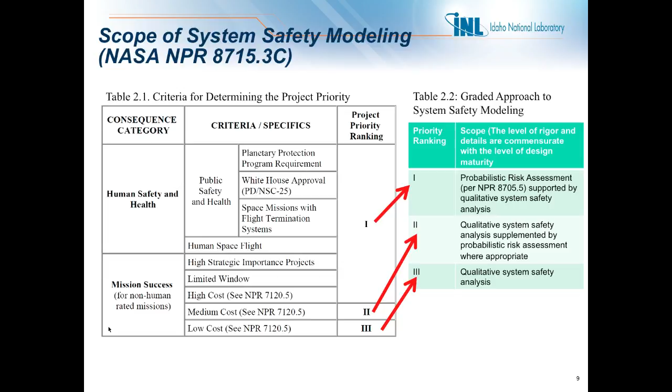At the Nuclear Regulatory Commission, of course, initially and still even today, they license based on classical safety analysis, where they tell you what challenges to analyze, and you have to show that you can meet those challenges. But PRA has been increasingly a factor in their decision-making. Not so much licensing, but decision-making about whether to intervene in licensee management. So after WASH 1400, the mid-70s, they did change some rules. And nowadays, to get design certification, you need to supply a PRA.

I'm supposed to mention risk-informed. They do both. They do the classical engineering analysis they always did, and they do PRA. You have to do PRA. But they don't have criteria that were mentioned this morning for Europe. They don't have hard numerical goals that you have to show you meet. They have numerical goals that you should address, but they are not licensing requirements. NASA, interestingly, uses thresholds for judging the suitability of systems for human spaceflight. That's a little different philosophy.

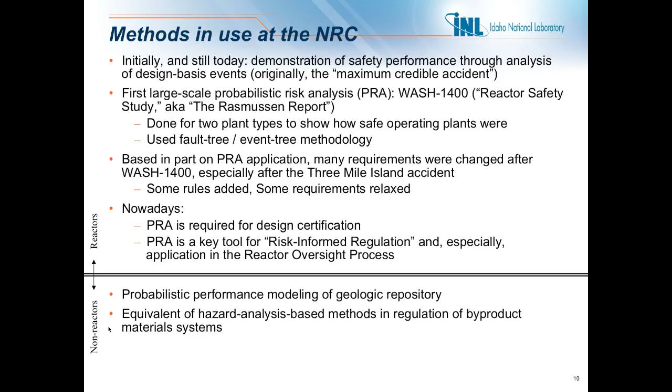At the NRC, at the bottom of the slide, I'll just point out the Geologic Repository people don't call it PRA, but they did a very thorough analysis of performance with a lot of attention to epistemic uncertainty. And then, of course, I mentioned already hazard analysis-based methods and regulation of byproduct material systems. So there's a whole spectrum in a sort of graded approach in use at the NRC.

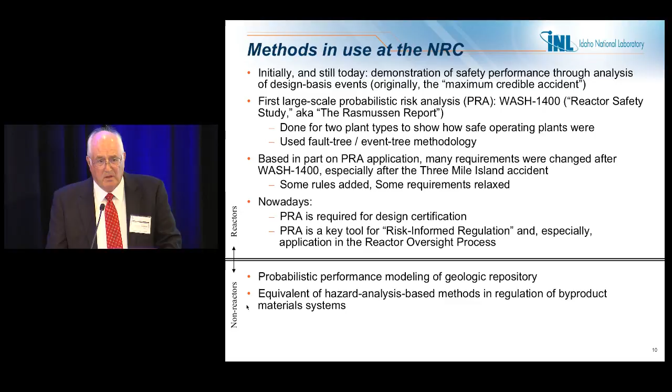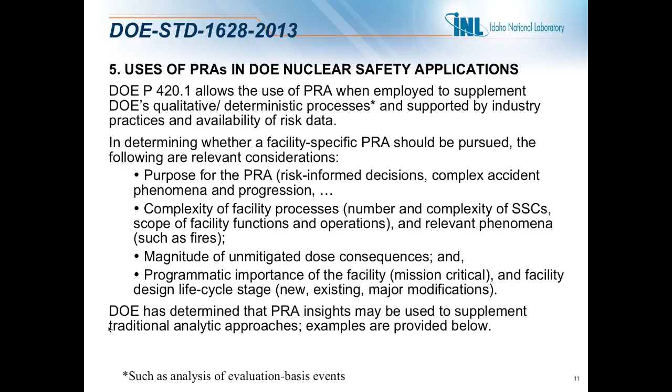So that sounds simple, and notionally it is, but if you begin to do it in fault tree space, it's just worse than daunting. It's just almost impossible to make sense of it in a logic modeling way. But it's easy, intuitively, to understand how the thing's supposed to work. When one breaks, you switch on the next. So the lesson drawn from this, well, he got 7 or 8 conference papers from people participating in the study. Every one of them that made any sense at all did simulation of some kind.

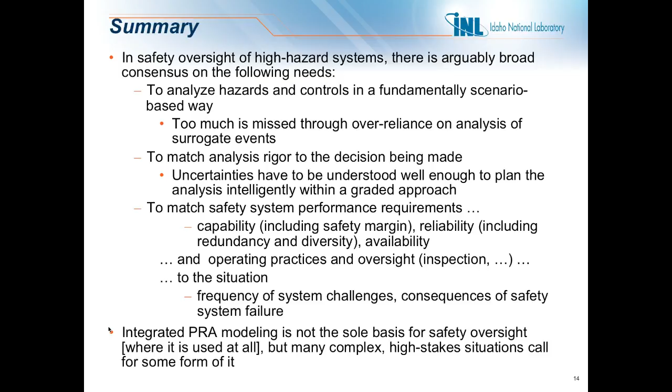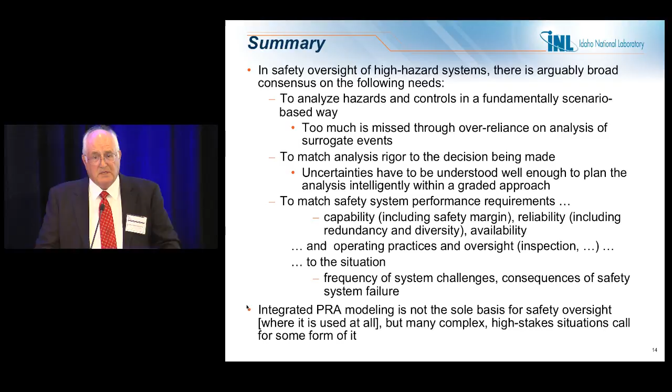So there's a point I need to get to here in the middle of the summary having to do with data. I would say that in our communities, in which I would include NRC, NASA, and the Department of Energy, a lot of us agree that there's a need to focus on scenario-based methods. And in that, I would include actually the hazard analysis methods that I had in the middle of my earlier slide. You don't have to be a full fault tree thing to be scenario-based. You just should be more detailed than having an engineering code telling you what margin you should put in. You need to match the analysis rigor to the decision being made, and you need to think carefully about how you're going to promulgate requirements.

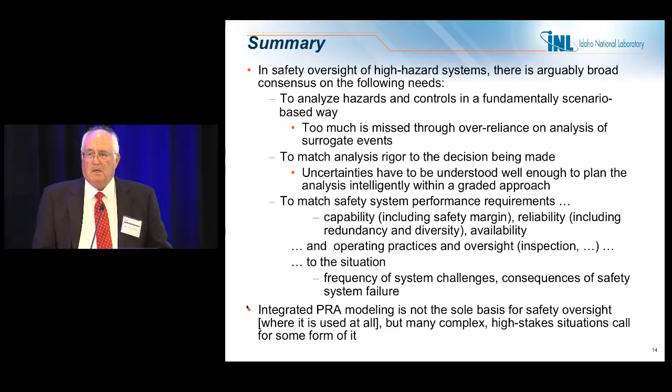Data. There's been actually, to my ear, some divergent positions taken with respect to data. Some people would say, well, they're uncertain, but I would argue that the right way to view a risk analysis is to say, suppose my scenario model is complete. The thing about the data, if I like the answer that it's giving me, then I need to commit to achieving the inputs. The inputs are investment decisions. They're numbers you have to make come true. And that's a slightly different answer than just saying they're uncertain. Sure, garbage in, garbage out, but if you like the answer, you want to make that answer come true, there are engineering implications of achieving those reliability numbers, achieving that margin.

So, not incidentally, by the way, and actually there was a slide like that this morning. If you have numbers in an owner-operator's PRA, a performance-based thing to do is ask whether those numbers are coming true, the inputs, not just the output.

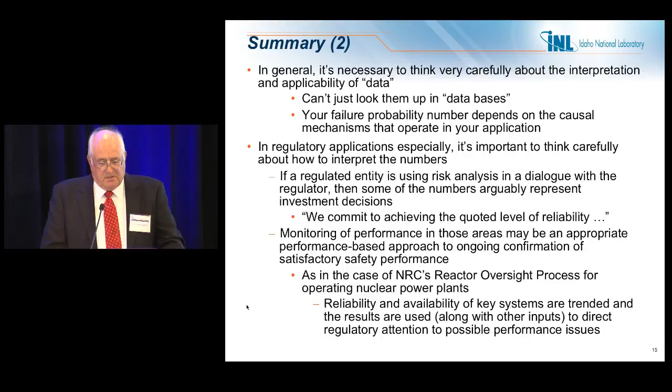And of course, there's a whole body of assumptions. I mentioned in the case of the NRC models, they will shut down if you know you're in a bad configuration. You may not have that luxury, but that's just the tip of an iceberg of a lot of assumptions having to do with the premise that the facility satisfies basic engineering requirements. So you don't get to forget about those if you're going to believe your PRA. You have to understand what drove the PRA structure, probability assignments that you made.

So in final summary, we've been doing this since the 70s, and we've learned a lot about doing it. The simulation-based stuff, if we combine phenomenology and reliability, that's extremely demanding, but as computers get better, it's becoming feasible. And we're learning better how to make more use of that. So that's the learning future for us in this PRA game. Thank you.

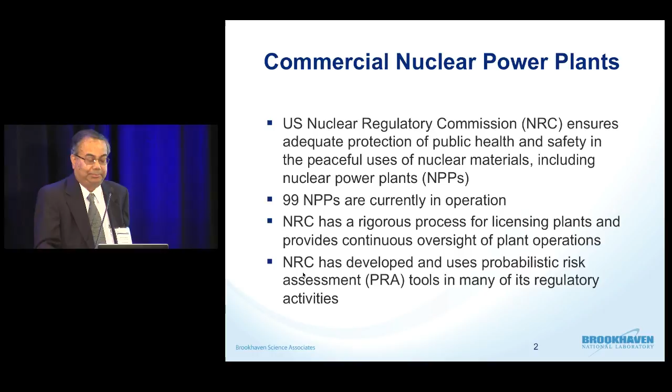I thought I'd give a little bit of introduction to the nuclear power plants and inspection requirements. And so I have these brief two slides that would also give a little background for the specific things that I'm going to talk about. Bob has touched on many aspects of the USNRC's work. I guess many of you are aware of it, and probably many of you were involved in the nuclear industry. NRC basically is responsible for the regulation of nuclear power plants to ensure public health and safety. There are about 99 nuclear power plants currently in operation.

And as Bob mentioned in previous discussions, NRC has been involved in and developed probabilistic risk assessment tools for many of its regulatory activities, and they are increasingly used currently. And as part of that, because of NRC requirements, all the operating nuclear power plants have plant-specific probabilistic risk assessment models done for them. And increasingly over the years, they have identified many uses, and they are increasingly being used.

And these tools have been based on many PRAs that NRC conducted over the years, and NRC had developed extensive programs relating to risk analysis methods, data collection, and tried to use risk insights. As part of that, NRC defined safety goals. Those are goals, not a regulatory requirement, and also had policy statements encouraging use of probabilistic risk assessment and these tools. The work that I'm going to discuss relating to inspection of nuclear power plants is part of the overall NRC oversight process.

And I believe it's approximately 15 years back or so, with the availability of risk information, NRC was involved in the process of improving their inspection process using a new reactor oversight process. And it is during that process more risk information was used and was increasingly found useful to improve their overall process. The basic idea in the reactor oversight process, which is currently used, and this will look very common sense, is to focus the inspection on activities where the potential risks are greater.

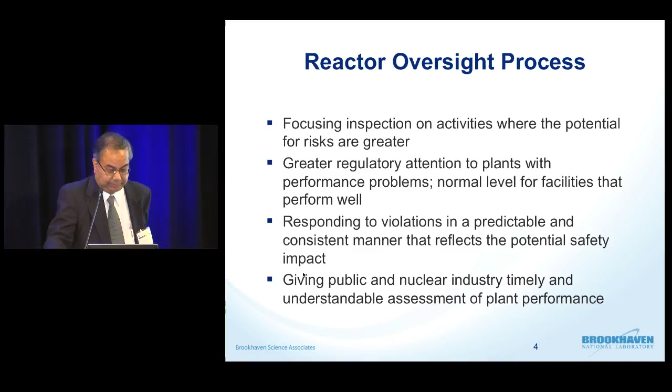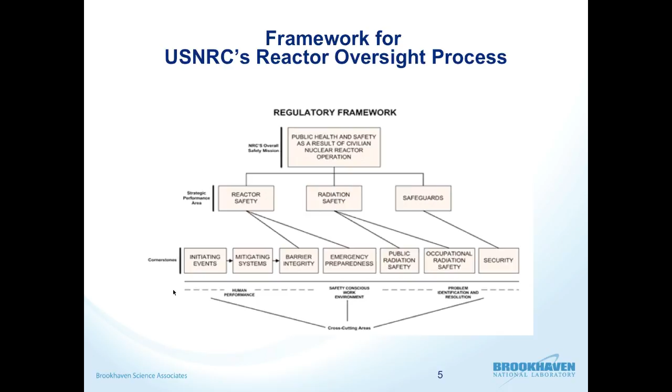So the idea or the thinking in this slide is that if you're able to address all the different cornerstones and the cross-cutting areas adequately through inspection, you probably would have adequately performed inspections and made identification of the issues that need to be addressed. So the oversight process and models try to systematically address all these different areas and, in a sense, try to maintain a similar structure and approach in the process.

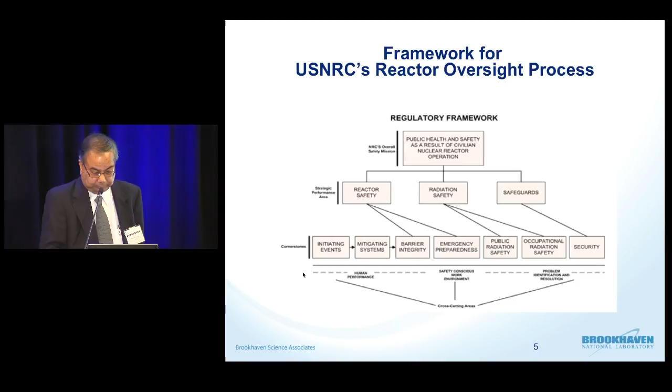Now, in trying to apply the risk assessment tools in the inspections, what one was looking for was to somehow relate the inspection findings to the risk implications. That, in a sense, gives a common currency, if you have a method that can be used across all the plants and can convert it into some risk number based on the findings. And in that way, some consistency can be achieved and different actions can be defined. So what we were looking for is a methodology to do that.

And what we tried to achieve here is an order of magnitude determination. Now, this is important because by selecting an order of magnitude evaluation, we were not looking for that level of precision in our modeling, and that simplifies a lot of things. In that way, your burden of accuracy in the data becomes a little less. You can make some assumptions in there.

And the reason we sought an order of magnitude evaluation is because ultimately inspection decisions probably won't be made based on whether it made a difference between 5.1 × 10^-6 and 5.5 × 10^-6. You'll make decisions based on whether there's an order of magnitude difference relating to the finding that has been made. And so in that way, a number of simplifications can be made. At the same time, your results would be adequate for the inspection decisions that you need to make.

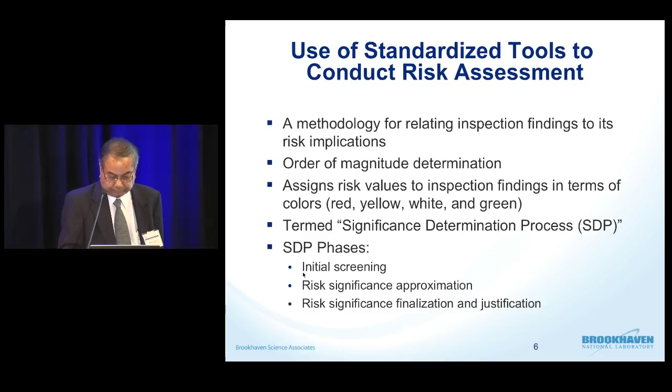Now, what we faced in doing this work: even though the nuclear industry had been working on probabilistic risk assessment models, and there were plant-specific PRAs available in all cases, within the detail there were a large number of variations in the model. In most cases, they used some form of event tree/fault tree modeling, but there were differences in those models, in the level they addressed, how they treated very specific issues. And so what we needed to develop are some consistent assumptions, because only by treating similar issues consistently across the models could we get consistent results relating to any defect, any findings that we found in a particular facility.

And one of the other requirements we had was that since the inspectors would be using these models, and all inspectors may not be very familiar with the risk methodology, and the risk methodology uses a lot of jargon and terms that are familiar to that industry but not necessarily to the inspectors at the facility, even though we were using risk information, we tried to present the models in engineering terminology that is commonly understood by the inspectors. These are based on discussions we had with the inspectors at the time we developed these models. So in that way, the inspectors would be more interested in using these tools, and their training requirement would be a lot less.

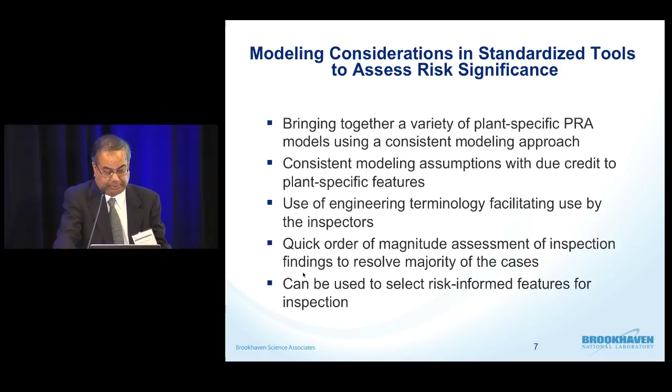And so this is one example; like in threat assessment, we have many initiating events in any nuclear facility. So all those events are analyzed, and as I said, we developed this model for all the nuclear power plants, and we had to make consistent assumptions, develop similar threat identification, similar initiating events for each of the plants, and corresponding mitigating measures that are applicable.

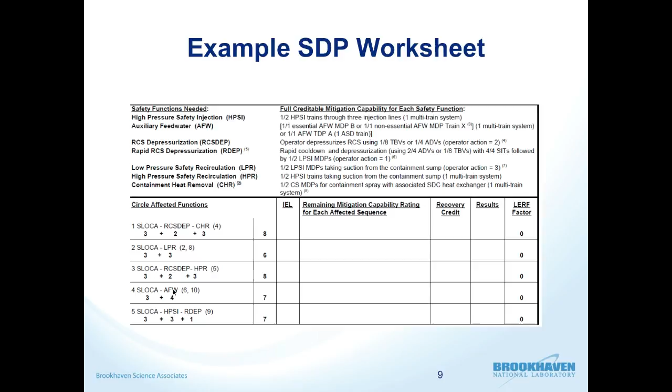So the idea behind it is that a significant risk modeling effort is involved, but it is ultimately presented to the inspector in terms of the essential barriers needed in a particular scenario, and the information is presented in a form that he can directly use for his inspection decisions. Of course, he's not handling only one worksheet. He has to handle a number of such scenarios, and these are computerized. The risk modeling information is available and presented to him in a compact form this way.

And similarly, from these numbers, from this scenario, he can also choose the focus of his inspections. And he can use the numbers, the overall risk of the facility or response to a particular kind of threat, in various ways. In terms of actions to be taken by the regulatory agency, obviously, there is a performance-based feature of the oversight process. If the findings are of increased significance, higher levels of action would be required.

In the case of the NRC's action matrix concept, depending upon the risk significance of the finding, if it is a relatively minor finding, it is left to the licensee, to the operators, to take actions. And at a certain level, if you are degrading a cornerstone, higher level management would be involved and certain other actions would be required. And at some level, if you find a major finding, if the risk is very high, it would be unacceptable performance, and the plant would be shut down.

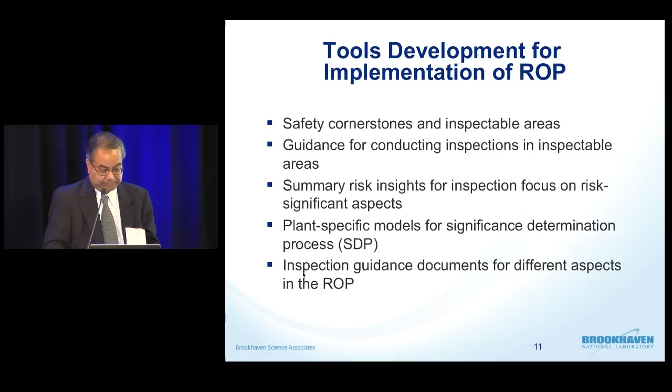So to wrap up, essentially, I have presented you a particular area. At the nuclear industries, the many areas worked on the risk analysis. I believe some of these features, some of the insights that we obtained could very well apply. And in this particular case, I think developing inspection guidance and tools should be very useful, and some of the insights that we obtained from this work probably would be applicable, hopefully would be applicable for your industry.

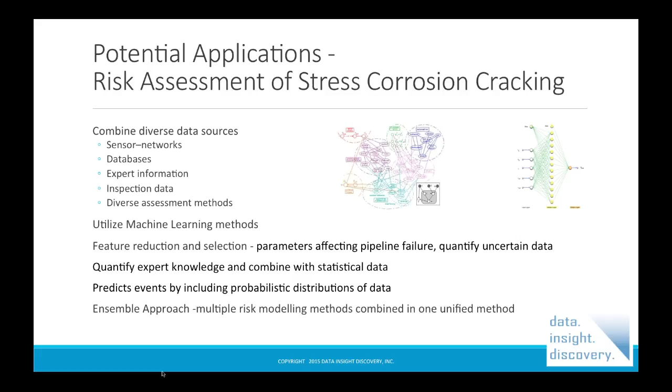So I've mentioned feature engineering, and in the whole area of machine learning, a lot of startup companies are using these algorithms to achieve all kinds of different things, anywhere from retail and marketing to predicting human behavior. We can look at relationships between the parameters and these nonlinear relationships to increase the predictive power of your risk scores. For example, we might want to look at the weather and the ground movement, but which aspects of those are really important? This is where machine learning can come into play.

We can do ranking of the attributes or look at attribute importance analysis. And some of these methods will actually exclude the attributes that were not important in predicting that particular outcome. So my message: keep calm and analyze big data, but really, use that data wisely, because big data can overwhelm your methods, and you do have to understand what you're doing with that and ask the right questions.